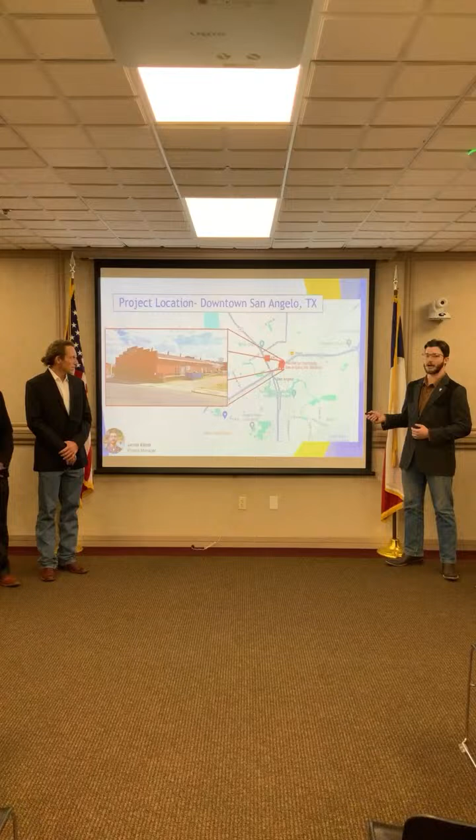So, here's our project. It's going to be on Chadbourne Street, right beside the Loop. It is a building, a warehouse that is split between Habitat for Humanity and Hartman Roofing. Our project mainly focused on the Habitat for Humanity side, but we did venture into Hartman Roofing to help get an understanding of the building itself.

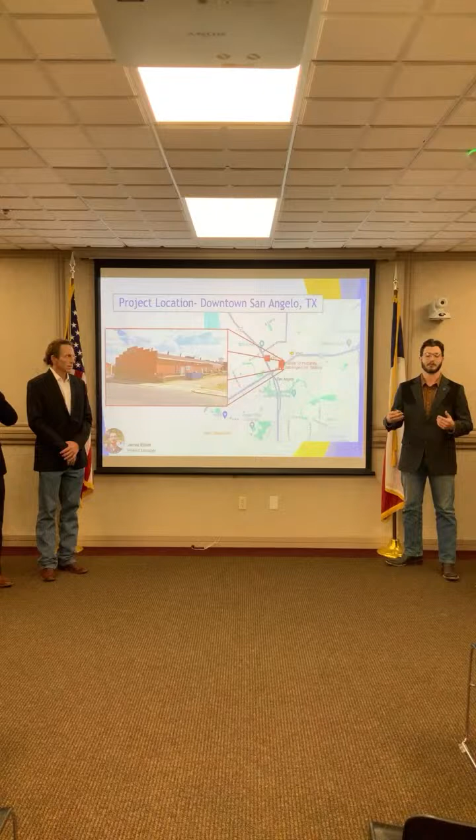For any locals, this is a layout just so you know a better picture of where it is. Here's some pictures of the building and the interior components that we had to go and explore.

Part of our project was to draw an as-built picture or diagram in CAD software so that we could give it to our client, Ms. Pam, so that she may further use it for any renovations or improvements later down the road. What we had to do is go in, take lots of pictures, take a tape measure, measure all of our structural components so that we could then draw out our components and walls.

For our project scope, we had to do our CAD drawing where we had to model the structure as it is today, so it is an as-built drawing. Then we had to perform a structural analysis on the existing structure so that we could evaluate if it is safe for use in today's world, given how they're using it right now.

Then we have to evaluate the existing watershed. One of the issues is that the building floods, letting water in through one of the walls, and we wanted to make sure we can mitigate that as much as possible so that we don't have any more damage to any materials they're selling or storing.

We're going to determine a solution for the loading dock and parking. One of the parking lots is caliche-based and is unlevel, so there's a large pool of water that sits there when it rains, and it's inaccessible for anybody who is handicapped, so they can't roll across it easily with a wheelchair.

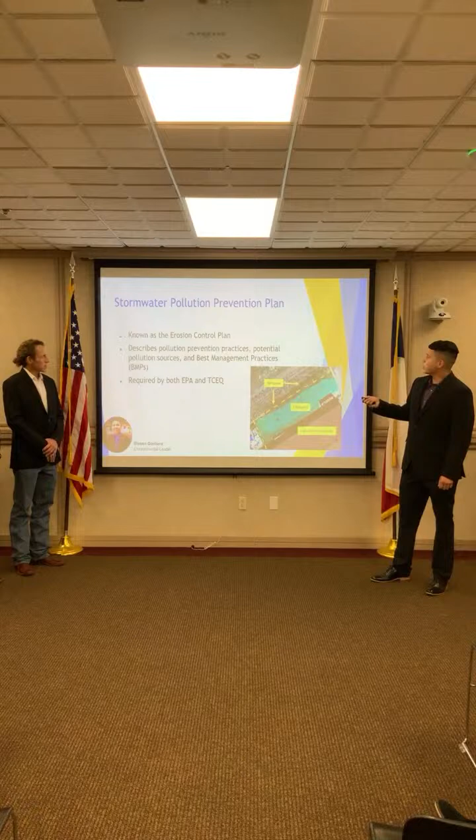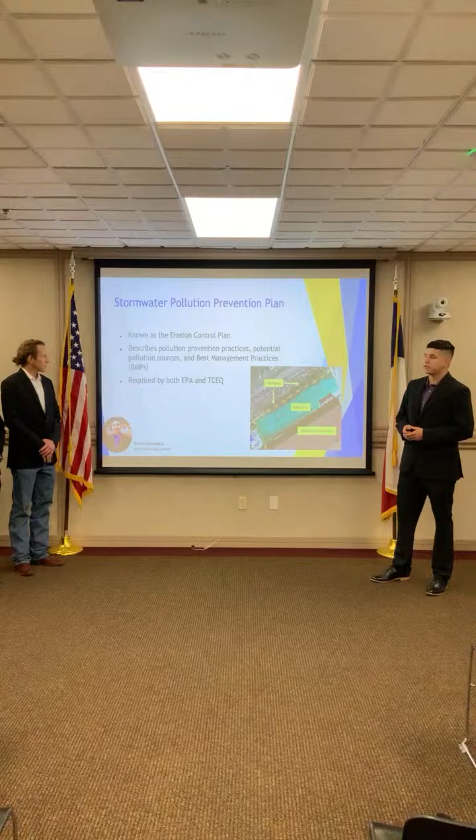The stormwater pollution prevention plan for this project, also known as the erosion control plan, describes the pollution prevention practices, potential pollution sources, and the BMPs on the project. Both are required by the EPA and TCEQ.

In the bottom right here, I have a picture of the parking lot that we're proposing to add to the site, and surrounding it, I have a silt fence, and then the Habitat for Humanity.

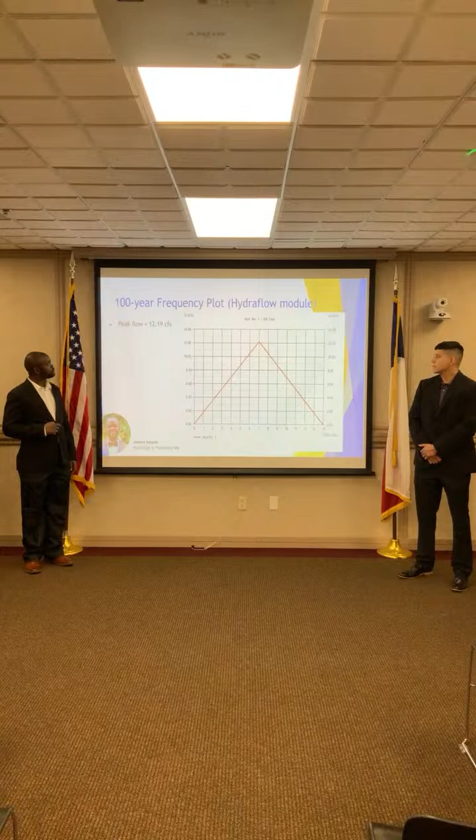The program gave us the peak flow for a 2-year frequency, about 7 cubic feet per second, with a time of concentration of about 7 minutes. Then we calculated the peak flow for a 100-year frequency, which was about 12.2 cubic feet per second. This is the flow we use to analyze the culvert.

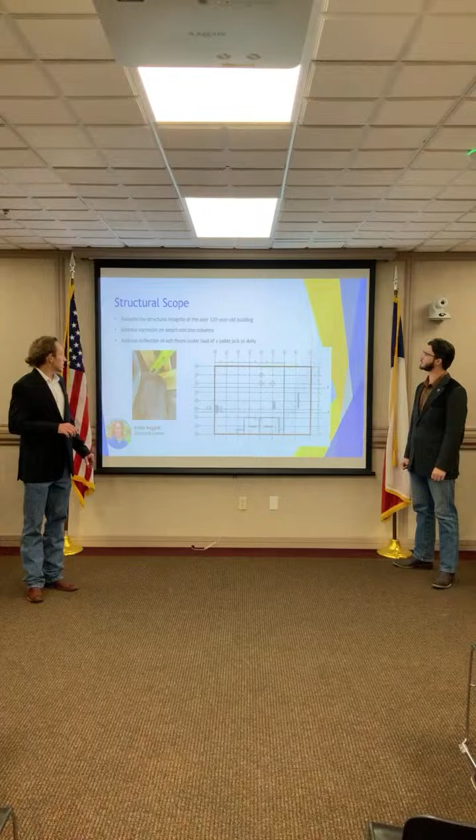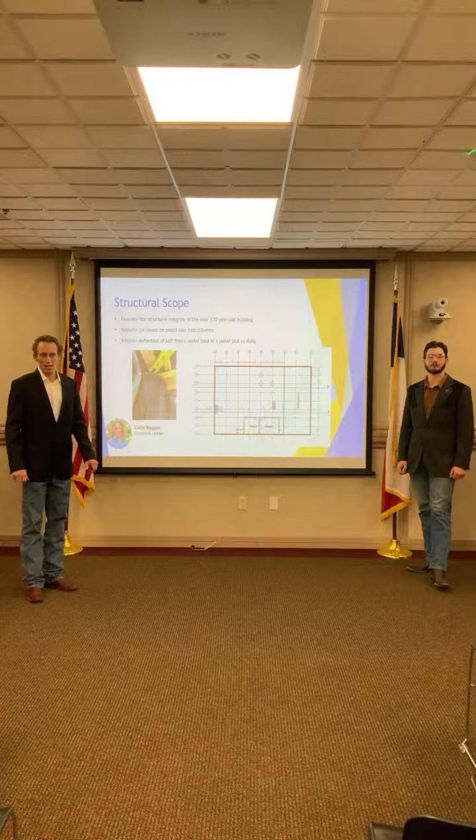Initially we had to go into the building with tape measures and find the dimensions of everything. There were no existing plans. The building was originally constructed in 1902, we believe, based on the nameplate on the front of the building, and the materials date from about that period.

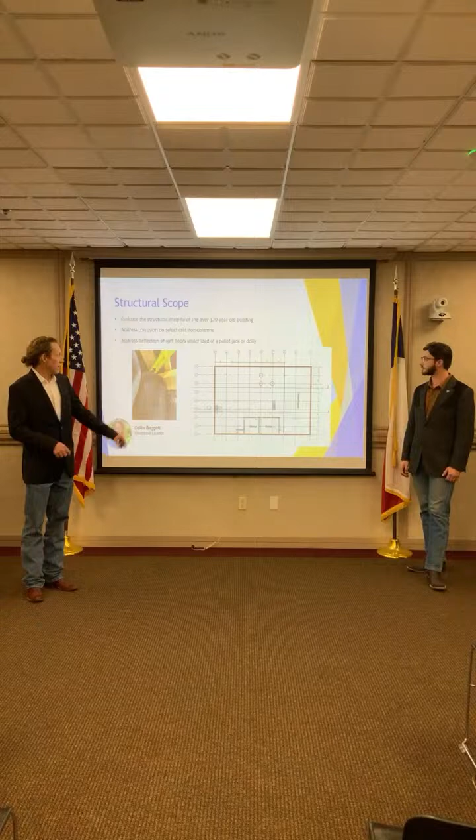The columns we found to have 3/4 inch walls. We also had to find the layout of the building for a 3D model, and in this floor plan on the right, you can see 3 columns that are starting to get corroded on the bottom, which we'll discuss in a minute.

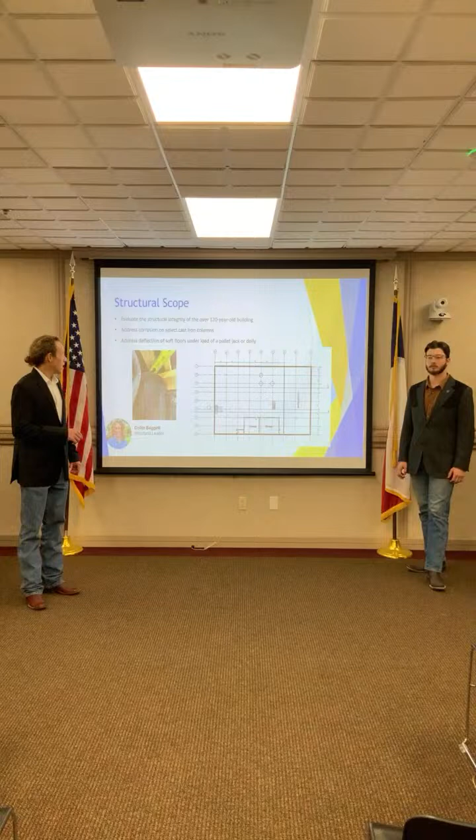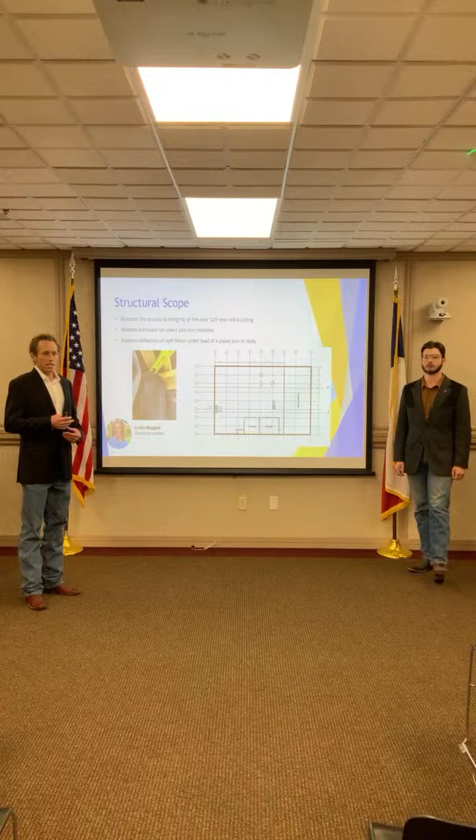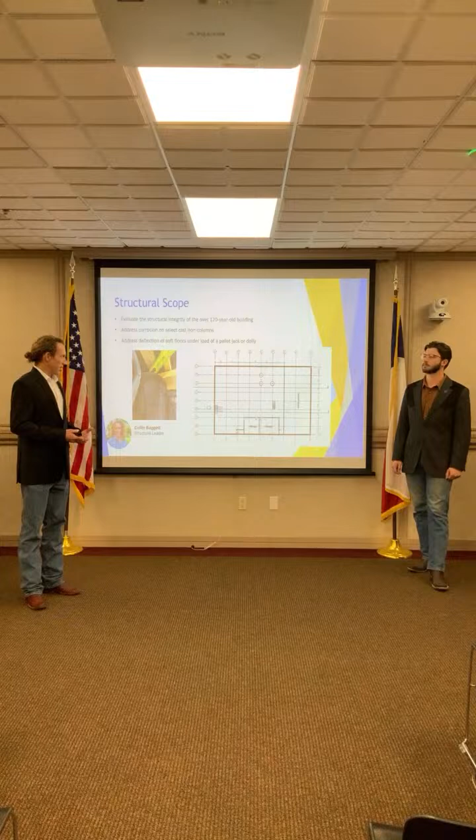So the scope of our analysis was to address the structural integrity of the corroding columns, and to address deflection on the floors. The floors were moving under pallet jacks. It kind of seemed that they were soft, but we also wanted to make sure it wasn't structurally weak and going to break through the floor.

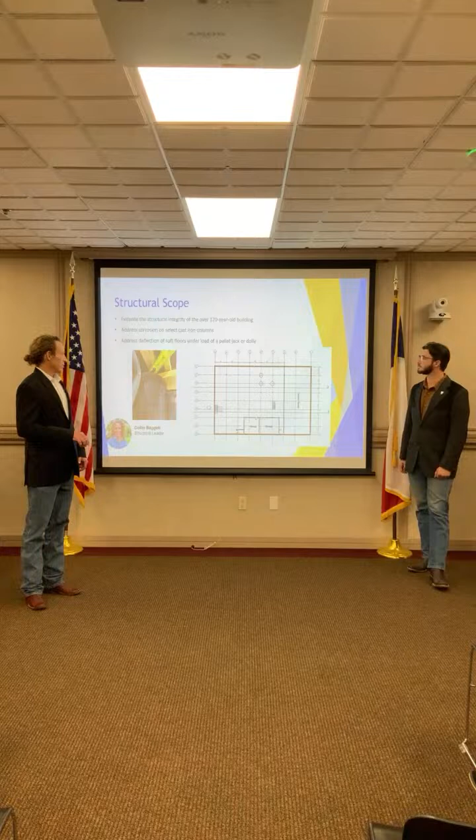So instead of doing the analysis by hand, we decided to use Robot Structural Analysis, which is Autodesk's software. Just learning the software was challenging.

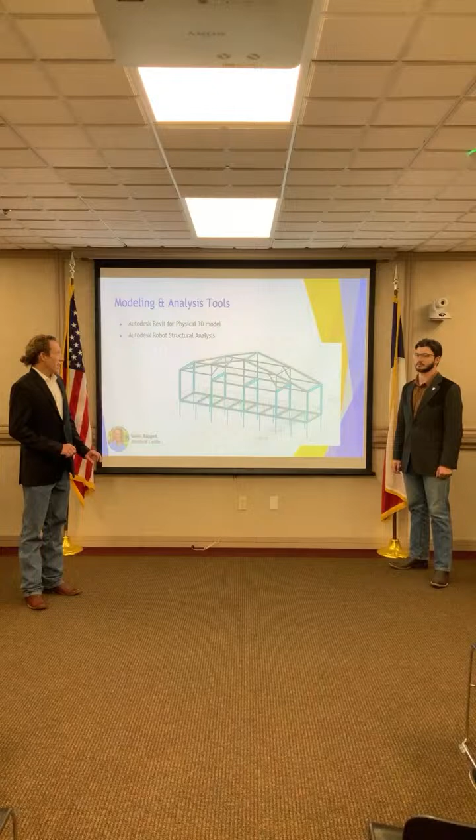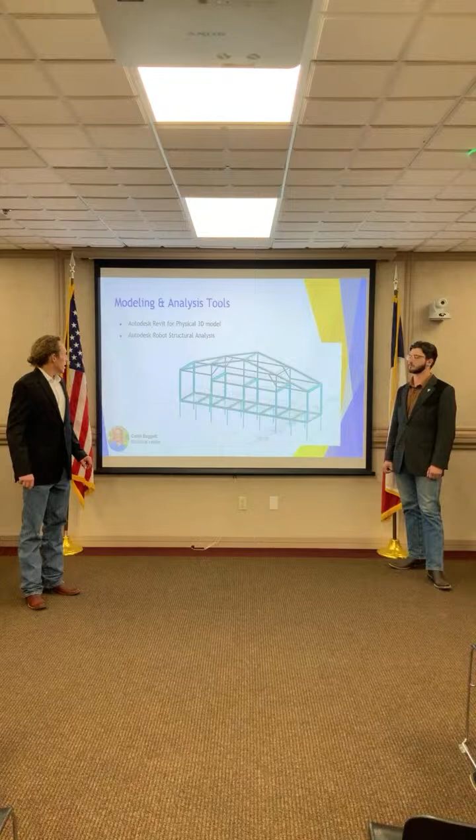Once the analysis was performed on the cross-section, the results could be interpolated to the rest of the building, given that it was symmetrical.

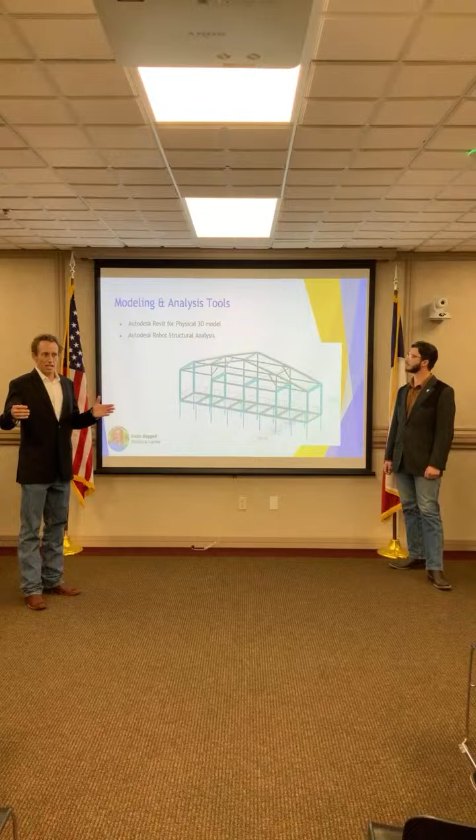Another challenge was being built in 1902. The materials used in the modern world are not equivalent to materials used at that point in time. Dimensions have changed, resources have changed, the source of lumber, the source of steel.

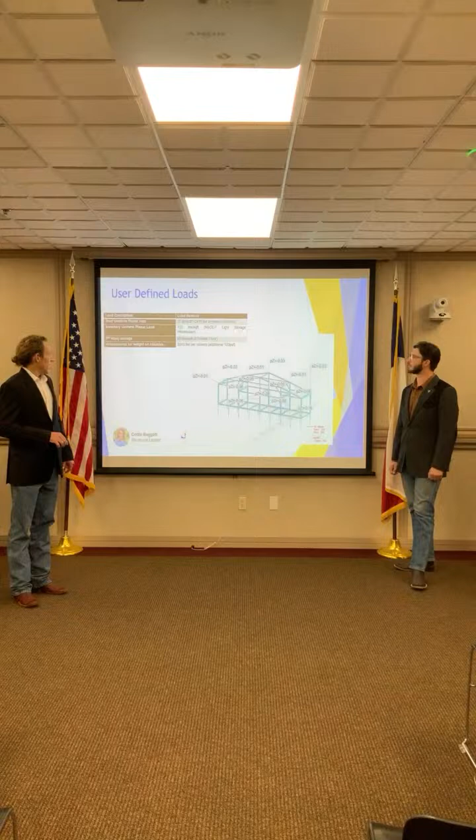On the second floor for the storage area, we approximated 60 pounds per square foot. And on the roof, a common load for asphalt shingles and decking is 15 pounds per square foot. Since we left out the cladding, the decking, and the joists and rafters, we went ahead and doubled the 15 pounds per square foot on the roof to 30 pounds per square foot, and could finally run the analysis.

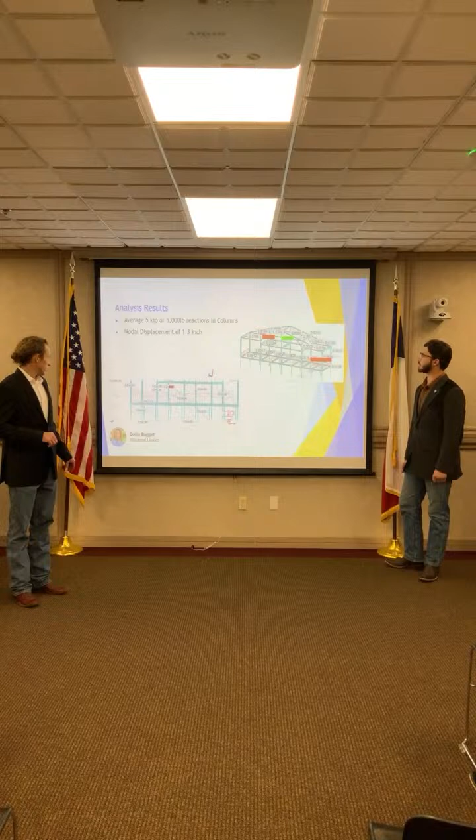These are some of the results that came back. This figure in the bottom left shows the loads. They're represented in kips. A kip is 1,000 pounds, and each of these columns roughly has a reaction of about 5 kips. So there's a support load from the facility's normal use of about 5,000 pounds on each column.

And this figure up in the right shows the deflection, nodal displacement or deflection - how far the nodes move. We did get this number of 1.3 inches, which is a lot, and I think that's an error in the model. I just ran out of time to chase down the error. Our average deflection for most of the other joints was less than 1/10 of an inch, which is expected in a wood structure.

Taking the analysis we did, finding a 5,000 pound reaction, we added 3,000 pounds for unaccounted weight, which still gives us 8,000 pounds per column.

On a table that we found from 1926 in the Chas Wade catalog, they had the 1/10 breaking strength of cast iron columns listed. And for our column with 3/4 inch walls, a 6-inch diameter, 8 feet tall, the 1/10 breaking strength is 28 tons, which is about 56,000 pounds. So if you find the actual breaking strength, which is 10 times more, that's 560,000 pounds per column.

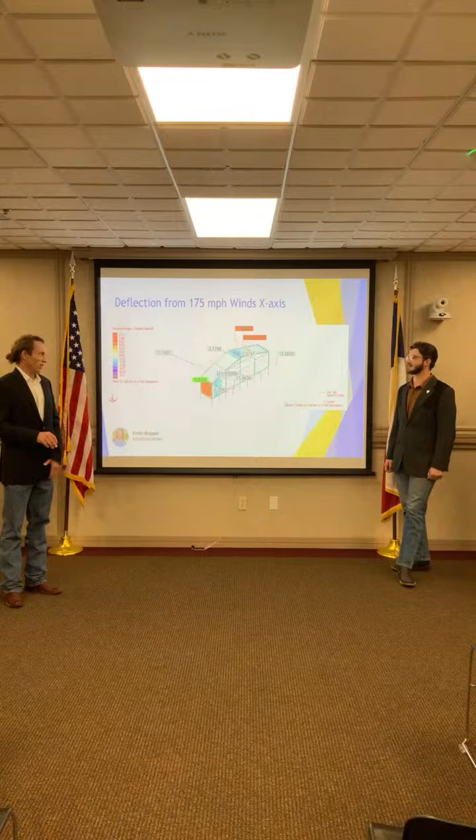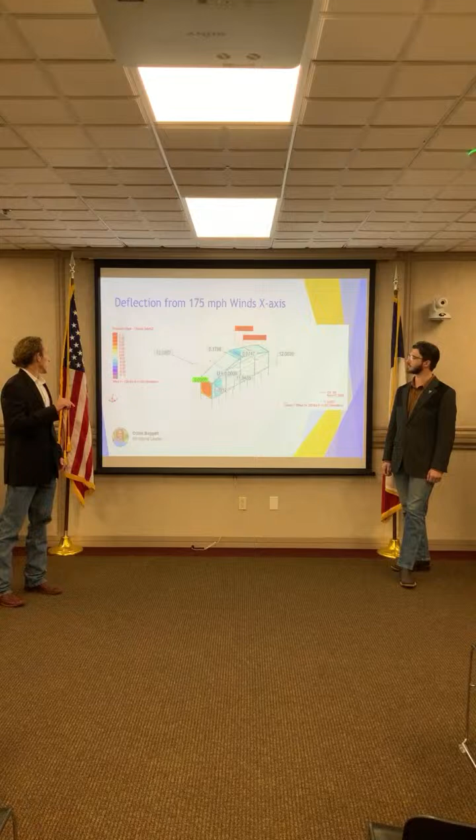For a wind analysis on a very extreme scale, we figured an F3 tornado, which is 175 mile an hour winds, or 250 feet per second. It was simulated on the x-axis, so the y-axis would be in this direction, and the x-axis is on the end of the building. This simulation is the wind blowing in the positive x direction, which would be north-south on the building. The actual uniform load on the side of the building would be about 1/20 of a kip, which is 50 pounds per square foot from the wind.

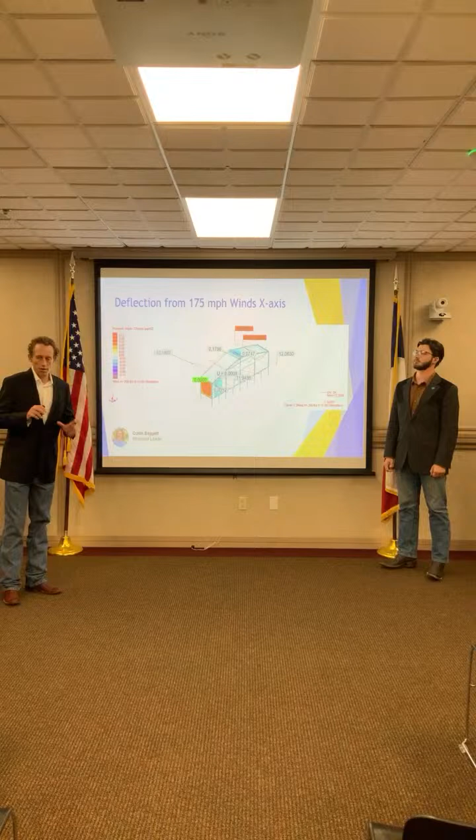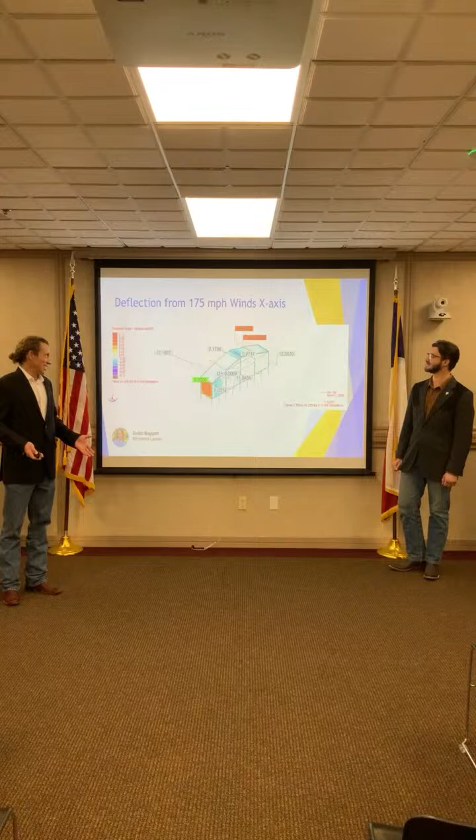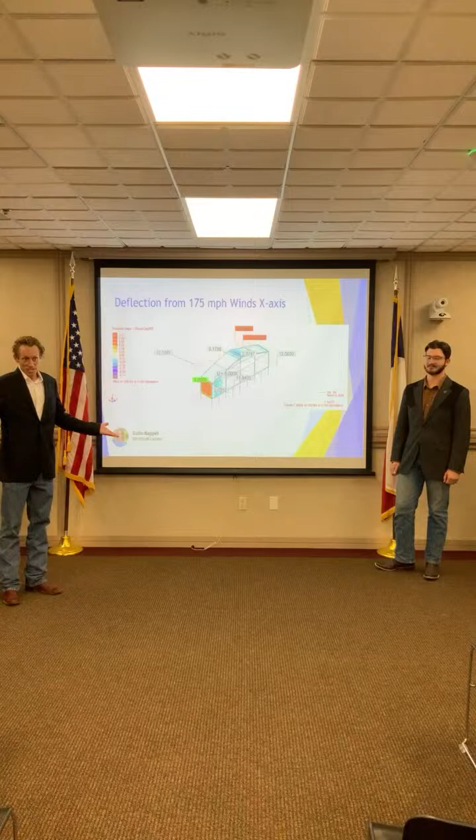The numbers represented here are displacements. As you can see, there's a displacement of like 12 inches, meaning your wall is going to move 12 inches, which is pretty bad. So the recommendation for dealing with a tornado situation would be to put anything valuable in the center, because the walls are probably going to break. Or the basement, which is a great place to keep stuff you don't want a tornado tearing up.

The minimum cost we found to neutralize the rust in the basement and paint it would be about $5,000. The solution to the soft floors - there is no structural problem, so you don't have to worry about the building collapsing under a load. The solution would be a new floor: deck the floors with plywood, and then you could go with a new type of flooring on top of it, or just leave the plywood.

The neighbors, the Hartman Roofing Company, have done the same thing, and they just have exposed plywood, and it seems to hold up to their forklifts on top of it, which is about 15,000 pounds on a loaded forklift. And then the final recommendation doesn't cost anything, but keep your valuable stuff away from the walls in case of a tornado. So I'll pass it off to Jeb, and he'll bring us to the end.

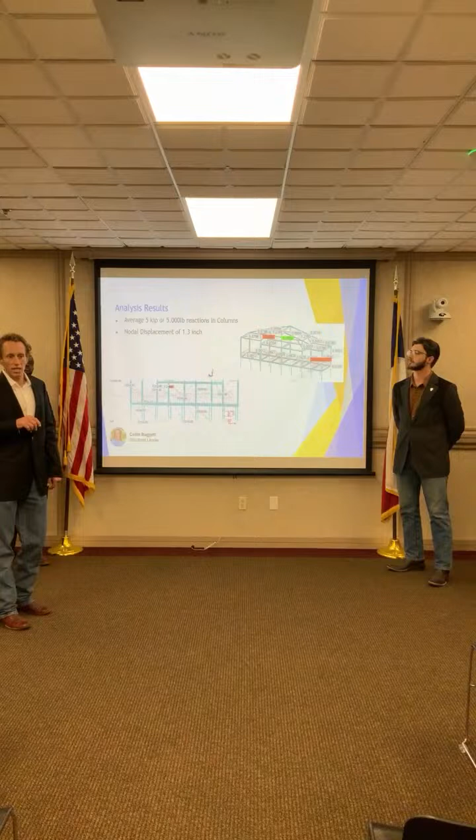Specifically, my question is, is that where that freight elevator is located? No, the elevator shaft wasn't included in this analysis. I would consider this more of a preliminary analysis to get a general idea of what the structure is capable of. To do a full detailed analysis, the whole building would have to be modeled in detail, which would include the elevator shafts as well as the stairwells.

So on that same slide, why do you have two red things and a green thing? You've got another one that's a displacement just as high and it's not marked. What's the coding on there? You've got two displacements that are in red, one of which is a 10,000th of an inch, and one is 1.2 inches, which is in red, and another 1.2 which isn't in red, and a zero that's in green. This was my first time using this software, and I don't have an answer for that.

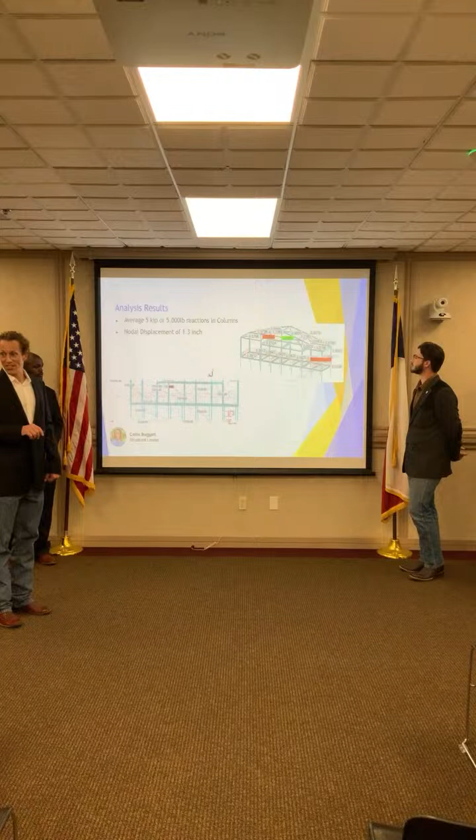Okay, go back to that. When it says the 1.27, where is that on the structure? Is it at a joint? Is it on a beam? Where is that at? I believe the 1.27 is at this right joint, right here.

I think it's an error in the model. I really don't think that's the actual displacement. I hope not, it's something to do with how it was drawn out. If it was, the building's been there 120 years, you would know it.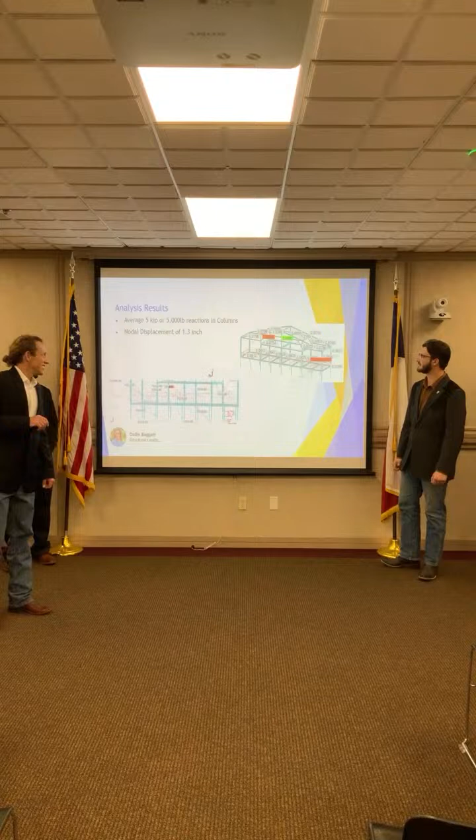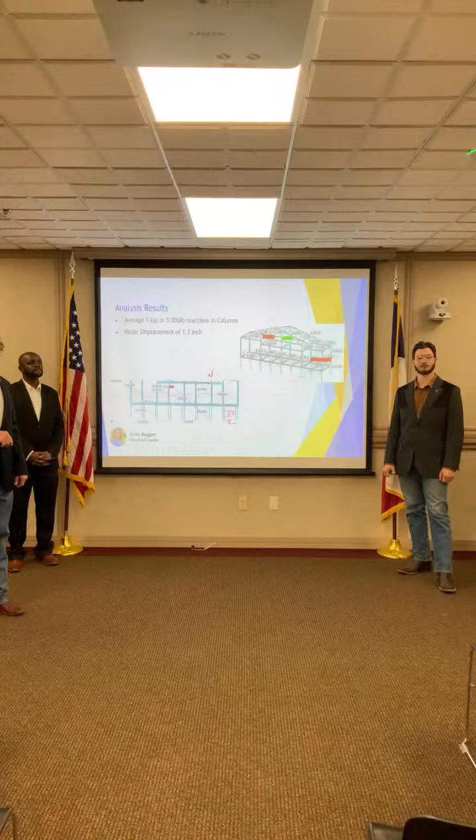I'm just a little concerned about the tornado, because my office faces north, and I have a window right there, so it's gonna fall in on me. Yeah, go in the basement. Or just leave. We know those things happen because of the warehouse collapse that was just a couple of blocks over. I think that was straight line winds that came through. We did suffer some damage, but what was surprising is like, an F4 tornado's big, and most of the displacement on the building was not significant. And these numbers are limited to significant figures.

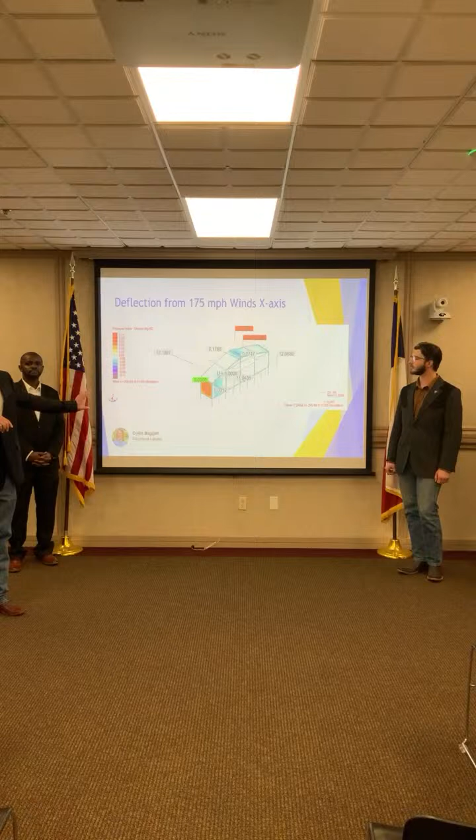If I had put them all on there, you couldn't even see the model because every number and every displacement in every direction comes up, and it gets really complicated to see.

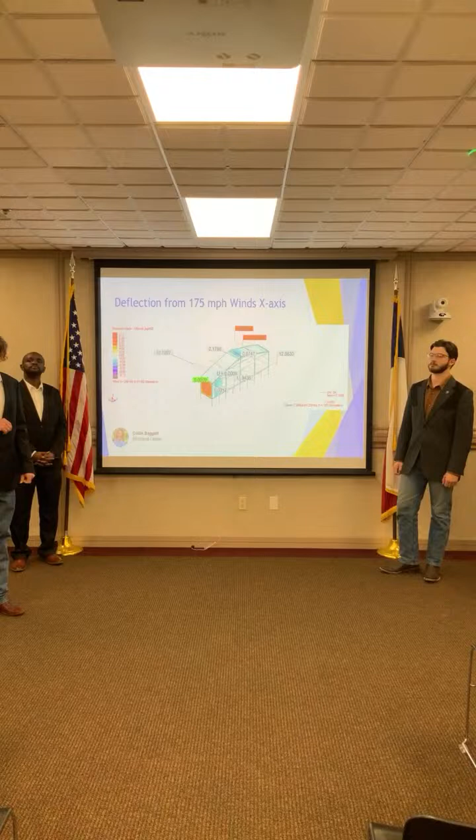So you said you used an F4 tornado. What is the code design wind load for this? Is that the code load, or is that just one you picked because you thought it was interesting? I thought it was interesting. I kind of ran out of time on the wind load thing. The structural analysis was the main focus, and we're coming down to the end of the project, so the wind was simplified for that reason. Because I'm thinking it's like 120 miles an hour here, but I don't remember.

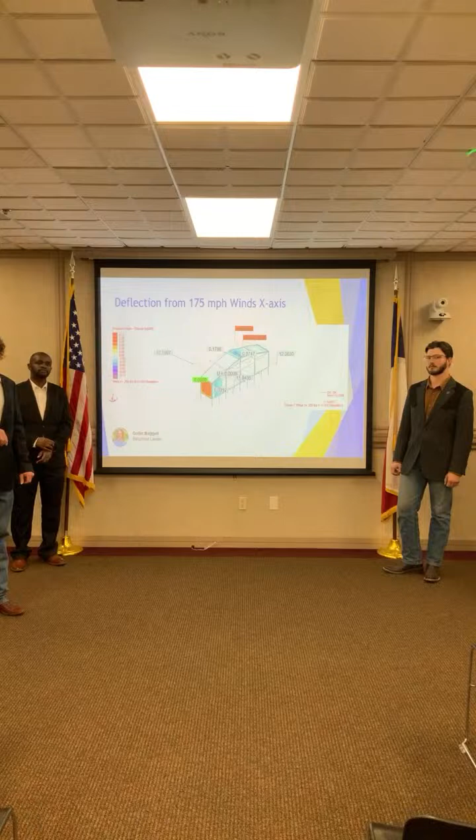Oh, here? Yeah, the design. I think the design is 100. That sounds right. I know in Miami it's 160, places with hurricane winds, it's about 160, and there's a factor of safety in that. I'm pretty sure that's not the design wind load for this, but you'd have to look up the code. I think it's closer to 120, but I don't know.

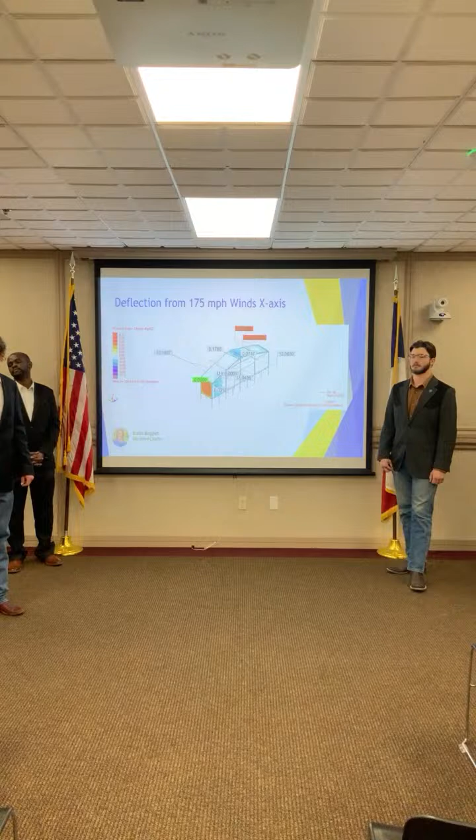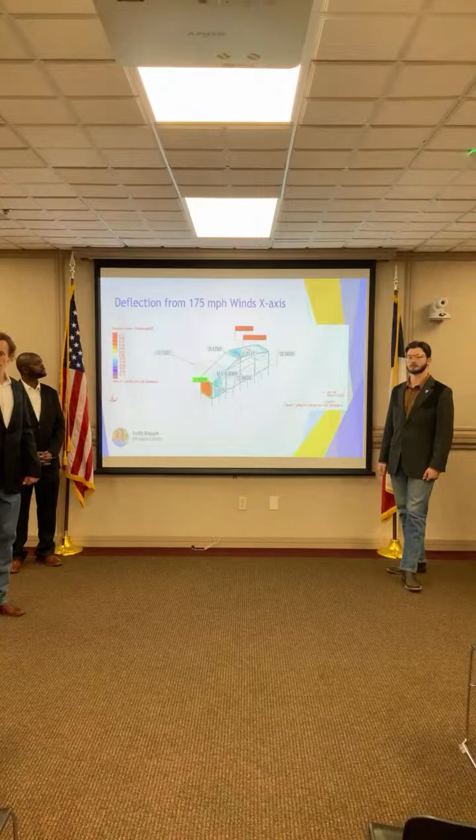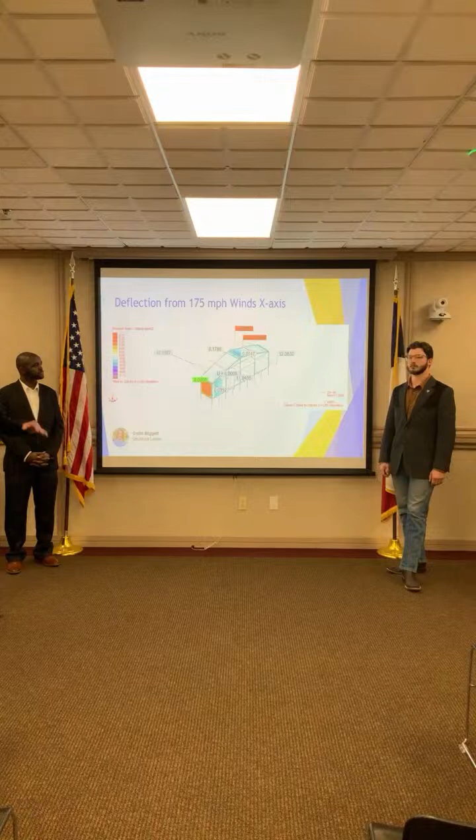So you did these on partial drawings, do you think that affected your scores any? Are you confident in saying that the whole building is safe even though you only did a partial structural analysis? For the sections that are represented by symmetrical geometry to the sections here, I would say yes. The loads were applied in the Z direction, which is straight down. It didn't account for any loads coming at an angle, which shouldn't happen in a normal situation, just for storage.

And the stairwells and the elevator shaft weren't accounted for either. But essentially, if you took the building facing Chadburn Street, and assume this to be the front of it, the structural support that's holding everything up, you could multiply this nine times and stack them together and have the full geometry.

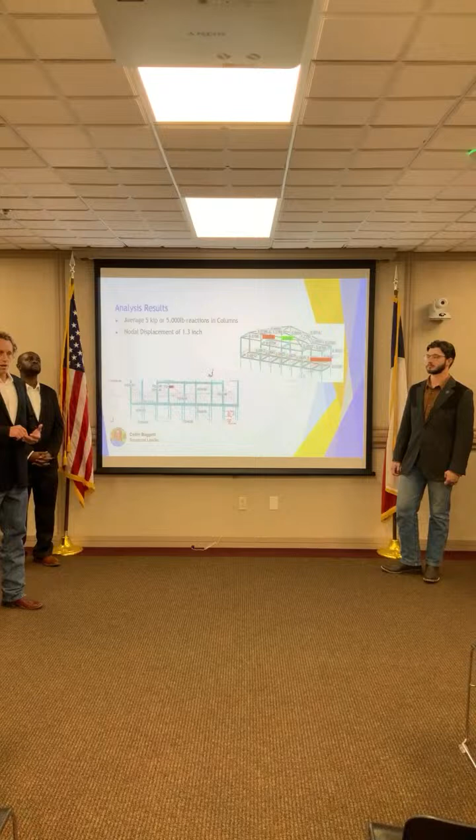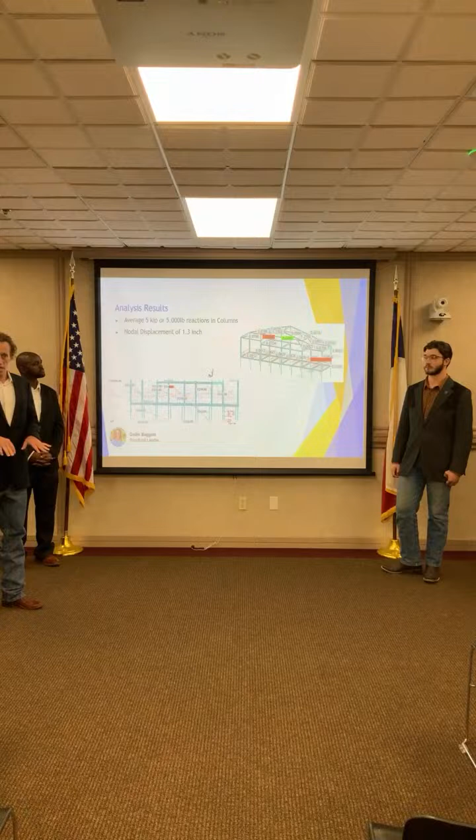So what are the limitations of your analysis? I think that's the question. There are huge limitations. Okay, so give us the top limitations. The stairwells weren't included, the elevator shaft wasn't included. The cladding was assumed to have no deformation, meaning that stuff like floor joists that are set on 12-inch centers and the flooring and decking on top of them was not included in the analysis.

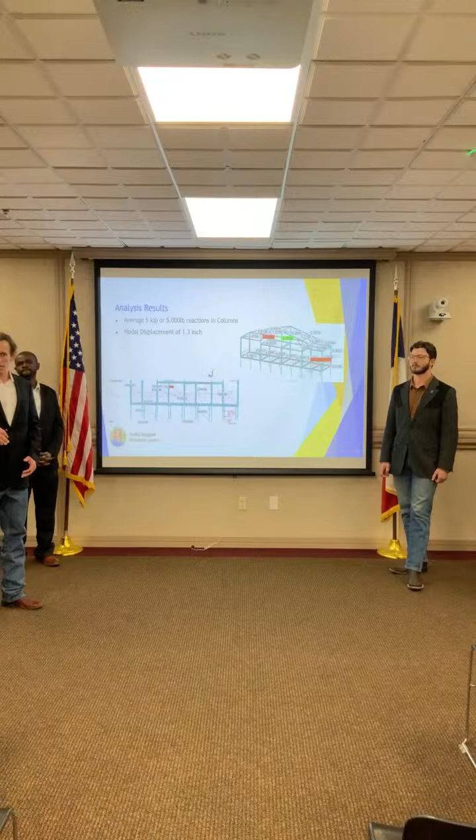Some of the material equivalents were close, but matching cast iron to hot rolled steel works to a certain point, but if deformation comes up, then you're dealing with a different breaking strength at that point. We weren't even approaching the strength of the column, so I don't think that would be an issue.

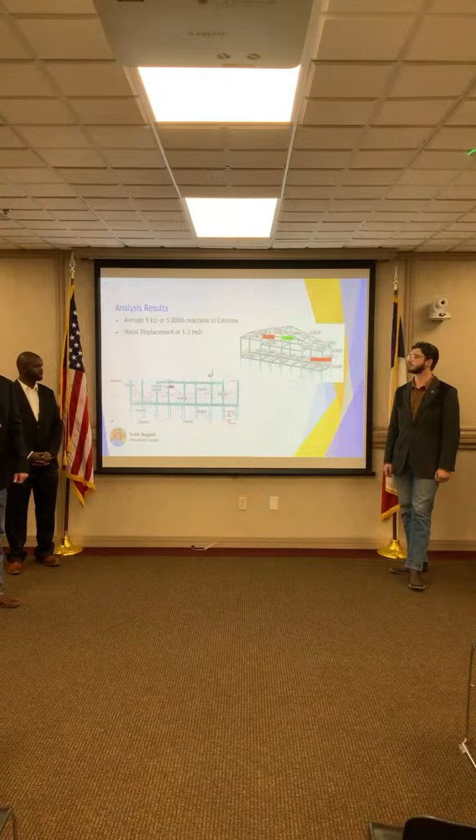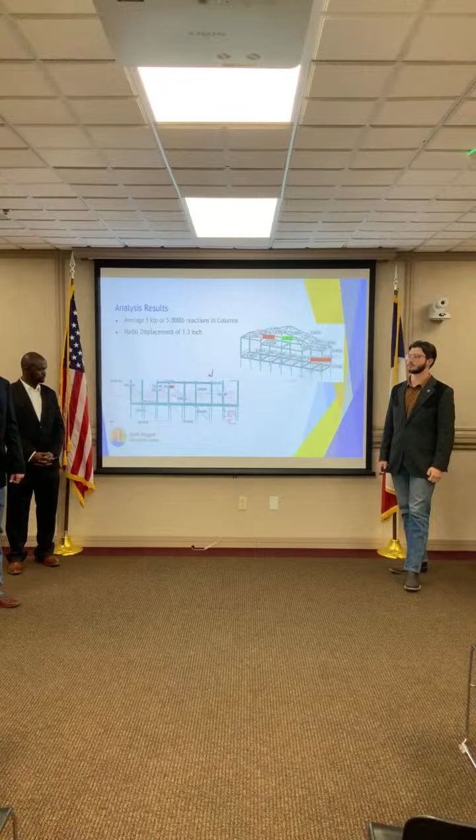Including wind load in with the dead load of the building and the self-structure weight, going into a proper detailed structural analysis was beyond our abilities as students at this point. It could be completed if there was concern, but at this point, with the light-duty warehouse classification, not having a significant amount of weight on the floor, it doesn't seem that there's an issue.

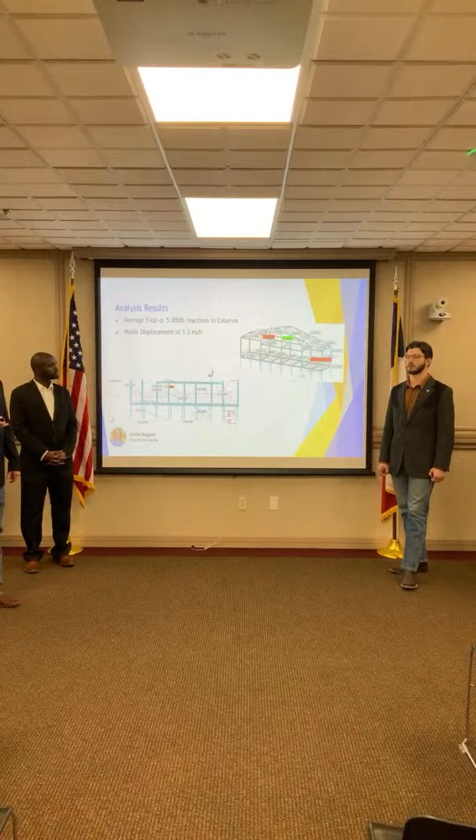Do you have recommendations for operating loads for the client then? Like, 125 pounds per square foot is what we factored the loads with, so that would be a pallet jack, a full pallet of materials, like a pallet of paint, shelving, eye-level shelving. 125 pounds is over the loads that are on the retail space now.

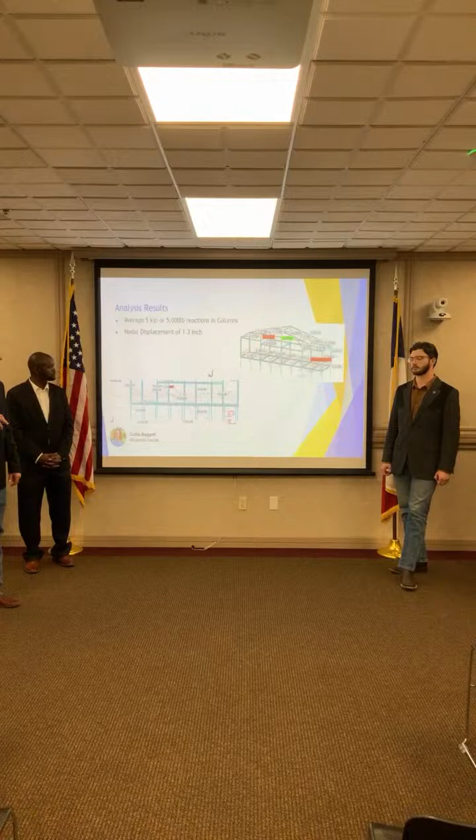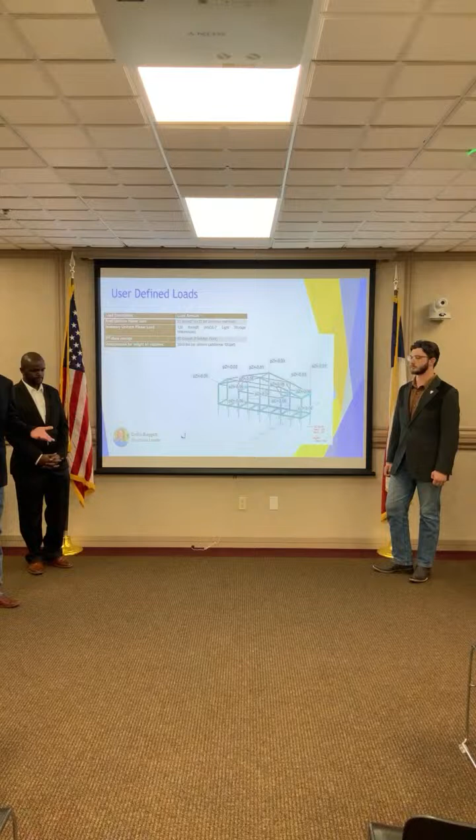And what about the second floor? The second floor, I forgot what you used for that. Did you use 125 on that, right? No, I used 60 pounds per square foot on the second floor, and that was really an estimate. It's the same load that this seating space would be analyzed at, which could be pretty low for a warehouse, which is why I'm bringing it up.

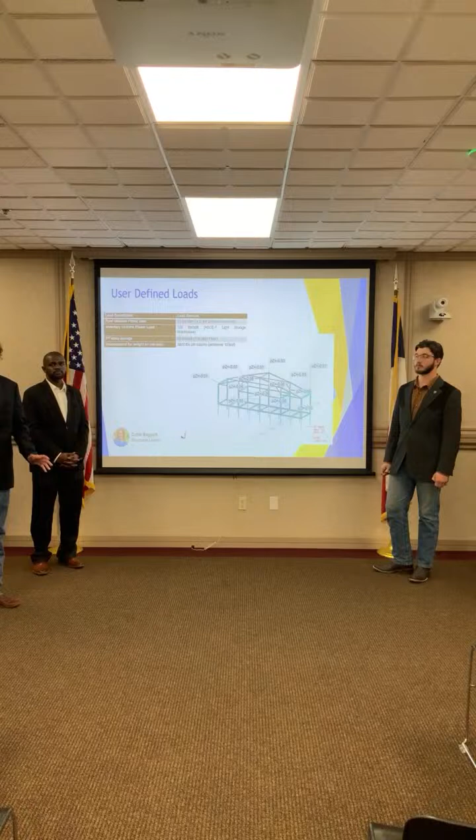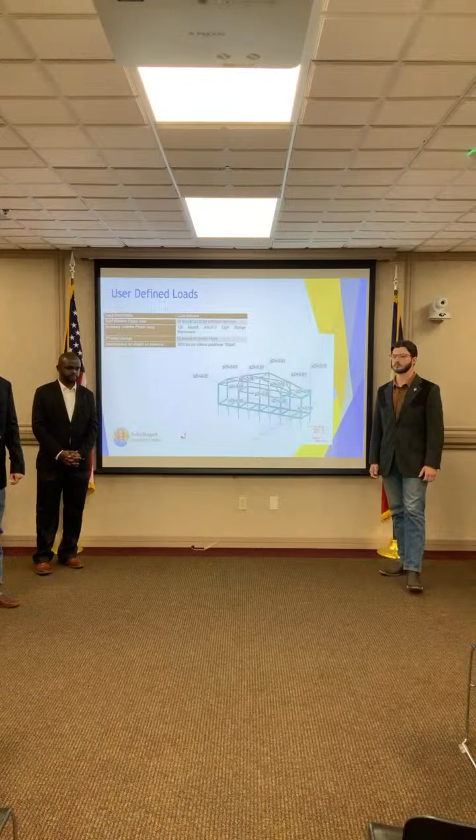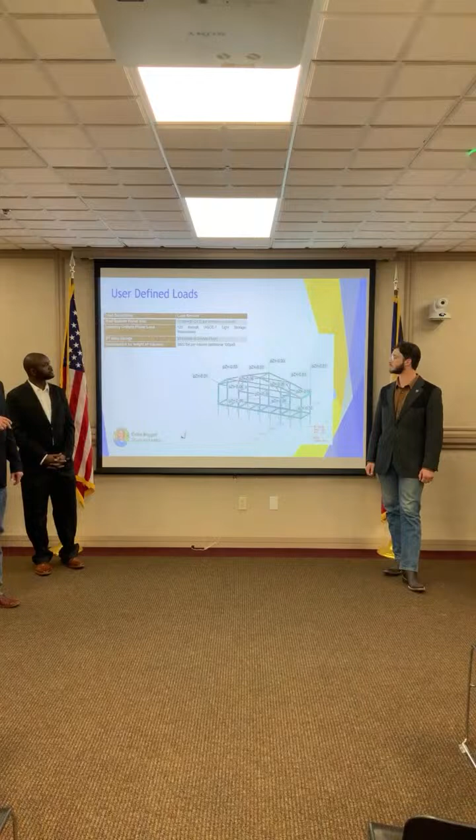Which would be low for a warehouse, but the only way to access the second story is through a small stairwell, and what's stored up there now is some light lumber and decorations from parties and things like that. We had even discussed demolishing the second floor, which is what they've done in the Hartman Roofing building, to open up and allow taller shelving in the retail space. So the use of the second floor was approximated, but it's not used in reality.

I don't know if that- I was asking if you could- the question was, do you have recommendations for the client on limitations for loadings?

Yes, like next door, they're running a forklift with 3,000 pound rolls of steel on it. It's probably about a 15,000 pound load that they're putting on the floor. They don't have any issues now. In theory, the columns and the I-beams shouldn't be a problem, but I wouldn't recommend driving a forklift in there without having a more extensive analysis done. We were hoping to get the answer to that question from this one, but our abilities and time were limited.

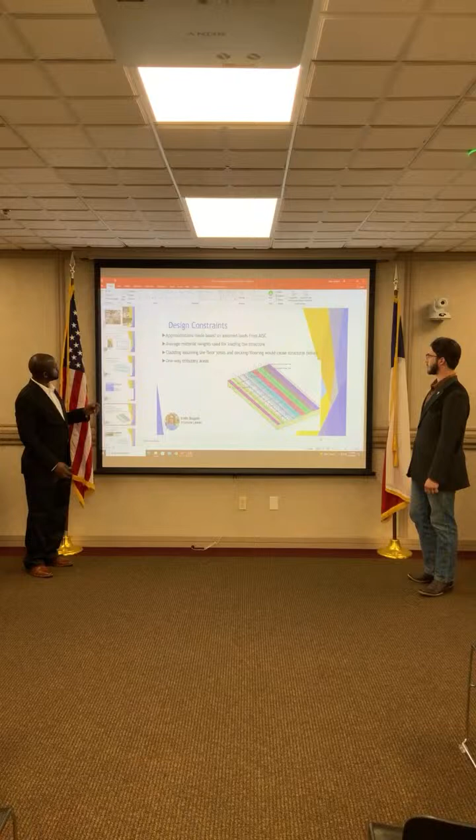Okay, your turn. Go to the slide where you had the concrete with the splits in it, with the 12.5 foot expansion joint. At the very end. Right, we passed it. This one? Yeah, right there. All right, you got 12.5 foot in a vertical direction, but 20 feet in a horizontal direction.

Yes, sir. Why? If 12.5 is what is needed to stop the cracking, why wouldn't it crack in the 20 feet in between that one and the edge? I don't know the answer to that. It just usually doesn't crack in squares, it cracks in rectangles. This is just a rule of thumb learned over time and use of concrete.

Okay, but if I remember right, you said 12 and a half was the minimum. So would that not be a minimum 12 and a half foot squares, and have another column running down splitting it into 3 instead of 2? No, I think it's just the 12 and a half for that one spacing. This spacing was not outlined in the document, in the requirement. It was just this spacing.

Is there a theoretical reason why you'd have different spacing in one direction than another? Not that I could find in the specifications. So in the specifications you found, 20 feet is acceptable between one and another? It doesn't say in different orientations, it just says you need at least the 12 and a half spacing for one direction. It doesn't say how to orient it.

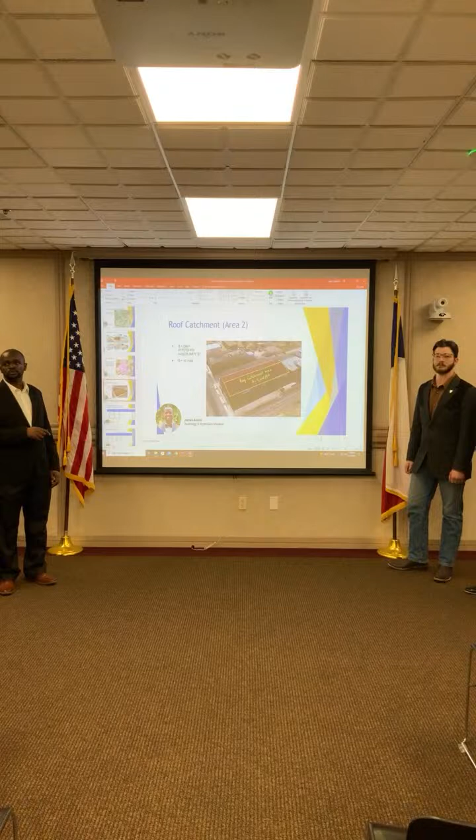So I didn't convert all the units here, that's what I'm saying. That's not Q equals CIA — 0.95 is your C, it should be 0.816, but that's definitely not your intensity there. And your area is in square feet where it should be in acres.

Yeah, well that's confusing, that needs to be corrected. The intensity was used based off of the roof and paved area, and this number you get from the tables, but intensity doesn't come from the roof — the intensity comes from your design.

Design storm — what's the intensity for the design storm? For 100 years, was that the number actually? Let me see if I can bring it up. When you were calculating, it's intensity right here. You called it — it's on the next one I think. You talked about you had a...

A 6.3 minute time of concentration. Then you said use a 30-minute to determine the Q, and then your Hydraflow numbers showed a 14-minute time of concentration. So you were all over the place on your time of concentration numbers.

Hold on, repeat your question again please. So at first you talked about having a 6.3 minute time of concentration you calculated here, okay, and then you said you used 30 minutes to determine your Qs. When you were calculating your Q, or your intensities, you said you used 30 minutes, I believe. No, this is what we use for 1 hour.

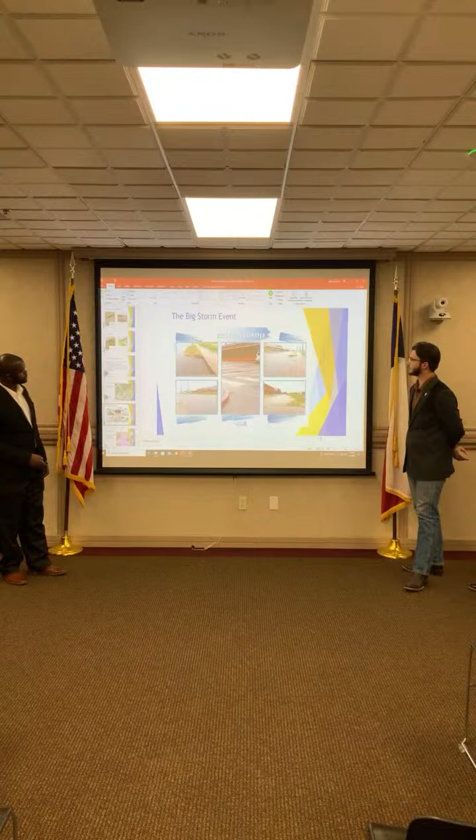Okay, where are you proposing the detention basin be placed? It'd be right here. So right here is the existing railroad, and there was the previous railroad right here, and it would be right there. So it's gonna be long and skinny in this direction?

Okay, so just like behind, it'd be adjacent to basically a parking lot. A long skinny detention basin behind where you put the parking lot, and the railroad. Right.

You decided not to do that because... is there anything wrong with that? Is it taking up space from your parking lot or something? I don't understand why you would. The railroad embankment, they were trying to stop construction over there, and the easement on the railroad, which we weren't able to find a good answer for. Okay, that makes sense.